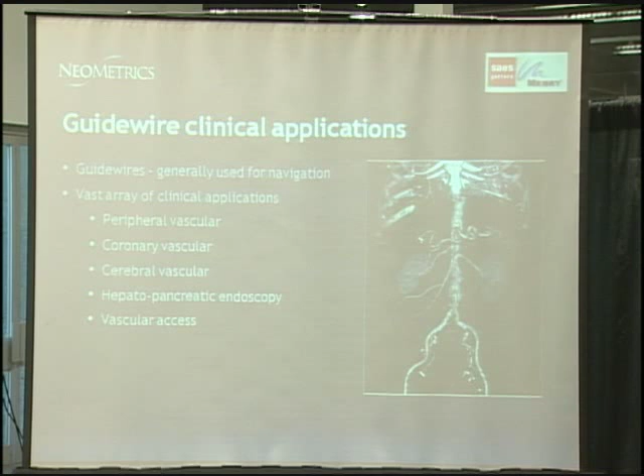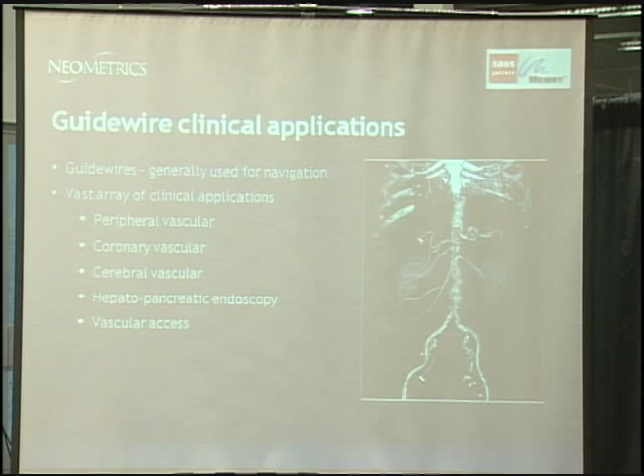GI, biliary tract access and pancreatic duct access, and lastly vascular access, which is typically for the placement of PICC lines and micro access for getting into the venous system.

When we look at guidewire design, we focus in on a variety of physical properties and physical attributes that really drive the performance of the wire. This relates primarily to the core material, not so much the selection of coil material or tip configuration.

But one of the most critical elements of guidewire design is the column strength or the pushability of the wire. This is a function of not only the material, but also coatings that might be used, whether they're hydrophilic, PTFE, silicone. But in terms of the drive to improve binary nitinol performance, column strength was one of the key targets in trying to improve the column strength of a superelastic alloy.

Torqueability is also a critical factor. Given the softness of nitinol, its torque properties are not as good as stainless steel, and it has a tendency to build up a lot of torsional energy, which when navigating through a very tortuous path, it will build up energy and then release, causing a very severe whipping effect. And we wanted to eliminate that property of binary nitinol in this new material as well.

Another frustrating feature of guidewire performance for the physician is what we call a torque lag, which is when the proximal end of the wire is torqued, there is a concurrent lag in the transmission of that torque to the distal tip of the wire. And again, nitinol is notorious for having a non-responsive torque lag property. Lubricity obviously is critical, especially in tight strictures, and hydrophilic wires are very widely used.

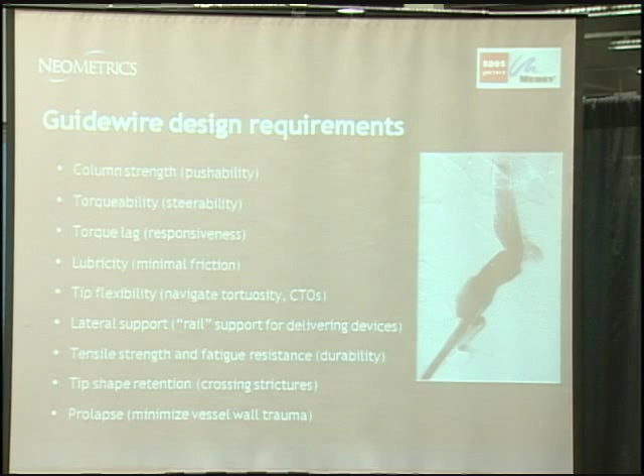Tip flexibility, we focus on tip flexibility matched to the anatomical scenario being dealt with. And so that is something that can be almost infinitely adjusted depending on the anatomy of the patient and the requirements. Now, we have a nomenclature system in the guidewire world where we measure tip flexibility in terms of grams of force. And so in PTCA wires, physicians are very accustomed to saying, well, I'd like a 12-gram tip, a very stiff tip, or a 2-gram tip, which is a very light tip. And they speak that language in terms of tip flexibility.

Another property is also the length of the grind profile, or the attenuation of the diameter at the distal tip, which is what we call the rail support of the material and the grind profile. The rail support is really the backbone of a guidewire for the delivery of various devices. Without the rigidity of the rail strength of the material, certain devices just can't be delivered, especially when they're moving through a highly resistive environment like a blood vessel with lesions or blood clot.

The tensile strength and fatigue resistance, we focus on these primarily from a safety perspective. There are requirements for tensile strength. The good news is all of these materials meet essentially all the tensile requirements.

One area that the physicians rely on heavily is after they have assessed the condition of the patient, have a feel for the navigational path that they need to take with the wire, they many times would like to modify the wire's tip configuration from what it was provided with in the packaging. And so physicians are very adept at modifying the tip configuration of a wire actually while they're standing over the patient. And the ability of the wire to retain that tip modification by the physician is critical.

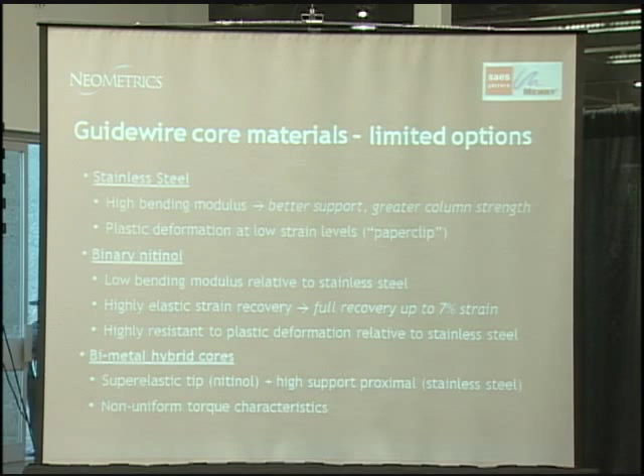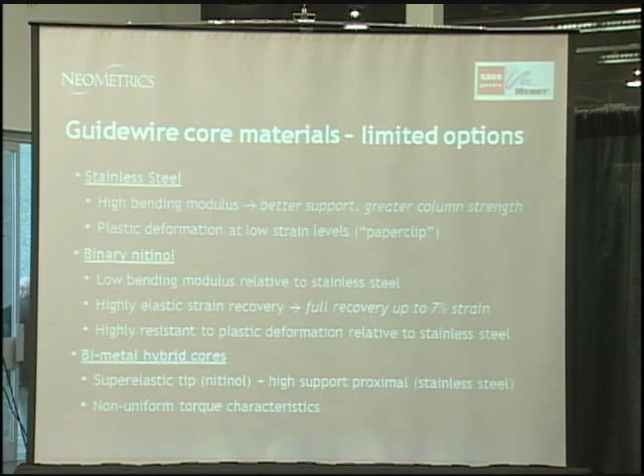The nice thing about nitinol is that because of the strain recovery, the physician can really navigate some very tough anatomy and abuse the wire, so to speak, without it taking a permanent set. But in terms of its pushability and its softness, it's not capable of delivering heavy interventional devices, especially when the wire is a very small diameter.

Another technology that's arrived on the market in the last 10 to 15 years is the use of bimetal cores. Bimetal cores are basically taking the attributes of nitinol and putting that on the tip of the guide wire and using the pushability and column strength of stainless on the proximal end of the guide wire. And there are a number of wires out there that incorporate the bimetal design.

There is some asynchrony between the torque transmission of the two materials, so you can imagine that when the stainless steel is torqued, you don't get a commensurate transmission of the torque to the distal nitinol tip. And there's a little bit of a training curve with the doctors, but these wires have become popular in certain applications. One in particular is PTCA.

So to really summarize some of the advantages and disadvantages, nitinol, obviously very resilient, able to navigate diseased and highly stenosed vessels, but very low on support. We like to think of it as a four-wheel drive truck, being able to go through some pretty tough conditions. It conforms to the anatomy without deformation.

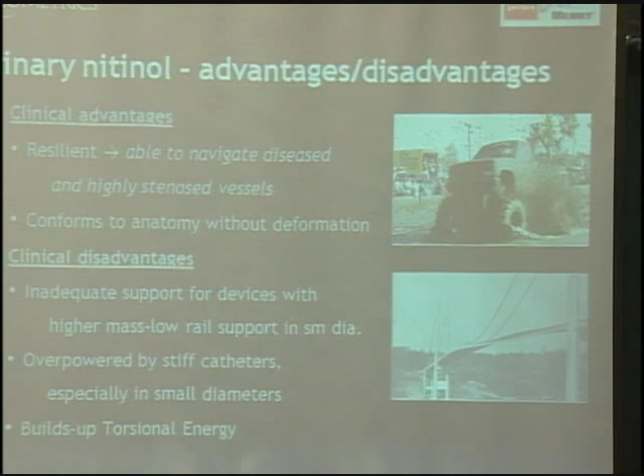The clinical disadvantages: inadequate support for devices, very low rail support, especially in small diameters. So when you get into wires that are used for neuroradiology, going up into the brain for embolotherapy or embolectomy, nitinol wires are great for that, but they generally don't have the rail support of stainless steel.

So the solution to this performance gap between the two different materials is what we're calling the Trident Alloy. And the Trident Alloy is actually a modification of binary NiTi, which incorporates a cobalt component. And for those of you who are chemists, you may know that nickel and cobalt reside next to each other on the periodic table. And the interesting property that cobalt imparts to this material is it raises the peak loading forces, or the modulus, for lack of a better term, of this material, while retaining the superelastic properties of NiTi.

So getting into smaller diameter guide wires, it provides much more rail support and pushability than a standard binary NiTi. It has superior torque transmission properties, and we think it may eliminate the need for bimetal type wires where, as I mentioned earlier, there's a fusion of stainless and binary NiTi.

What we're also finding is that there are certain applications like jacketed wires where an outer jacket is required for electrical insulation. The core material diameter is minimized because the jacket has to be a certain size and the OD of the product has to be a certain size. And this material allows an increase in stiffness, superelastic behavior, while maintaining the fixed diameter constraints that the engineer has to deal with.

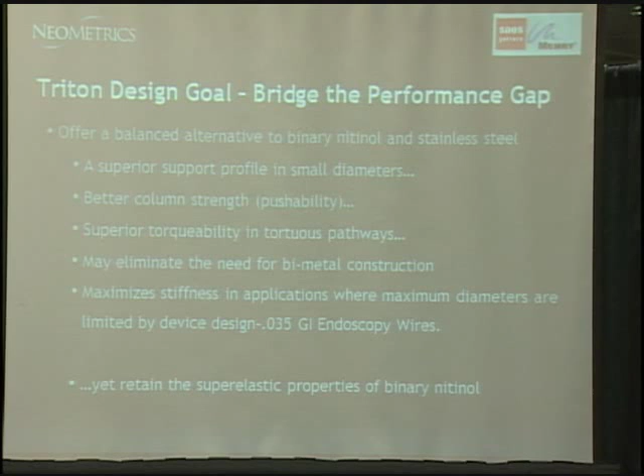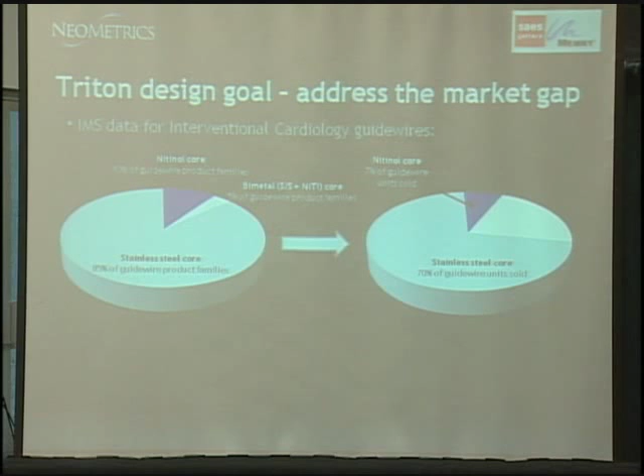So our goal was to really bridge the gap between the stainless market and the nitinol market. And based on the testing that we've done so far, we think this material will actually do that. Right now, in interventional cardiology, only about 10% of the guidewire families that are out there, now these are groupings of products as opposed to every individual code, are nitinol. And the bimetal wires represent about 5% of the families, but they represent a huge percentage of the actual total volume.

The BMW wire, which many of you are familiar with, the balanced middleweight from Abbott, is the #1 selling wire. That is a bimetal wire. And of course, the technology and the cost of bringing those two metals together in a single guidewire design is fairly expensive. So the solution to that problem is to come up with a wire that has a single body construction, a unibody construction, but have the column strength on the proximal core and the flexibility and superelasticity on the distal tip.

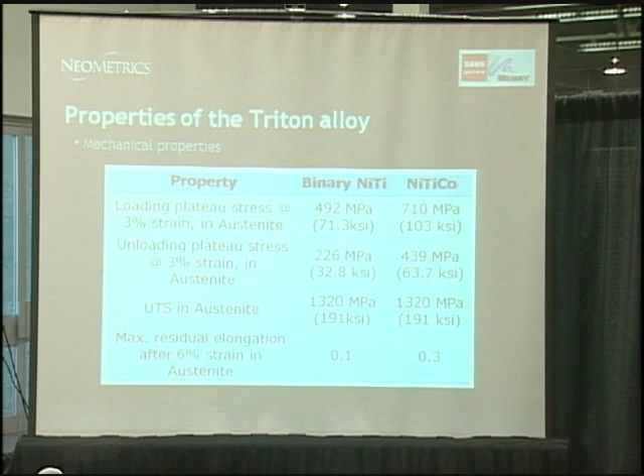As I mentioned earlier, what we've done with this material is we've incorporated a cobalt element to the nickel titanium crystal structure, and as a result of that, we've increased the modulus of the material by about 40%. In terms of some of the actual numbers, the loading plateau stresses for binary NiTi are about 492 MPa, or 71 KSI. This material in the equivalent diameter at 3% strain is at 710, a significant increase.

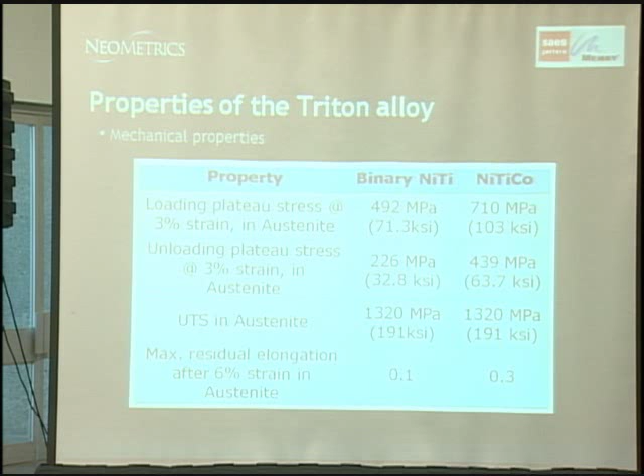The unloading plateau stresses coming off the hysteresis curve are 226 for NiTi and 439 for the cobalt NiTiCo. So you can see across the board the stiffness properties of the material, both in loading conditions and unloading conditions, are considerably higher than binary NiTi. This is the typical 3-point bend test with the hysteresis curve. If you look at the two loading curves side by side, you can see that the peak loading forces are about 40% higher.

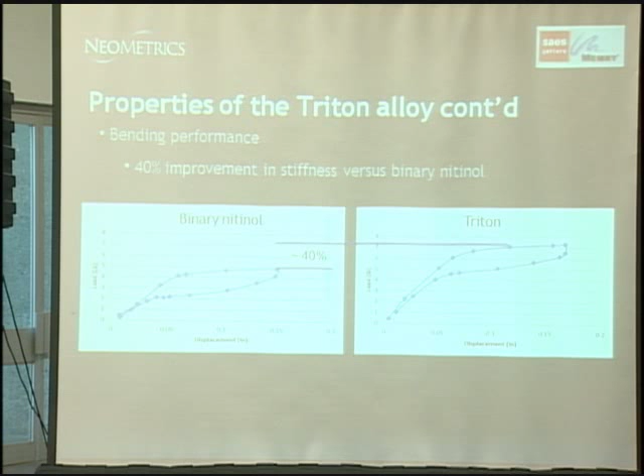Getting back to the effect of strain on stainless steel, this again is a 3-point bend test showing the loading of the stainless steel to a maximum strain level, and then when the load is released, the wire does not go back to its original 0 starting point. That's the plastic deformation that we talked about earlier. The Triton alloy is right between stainless steel and binary NiTi, with a hysteresis curve similar to binary NiTi, but going back to a 0 starting point within 6% strain.

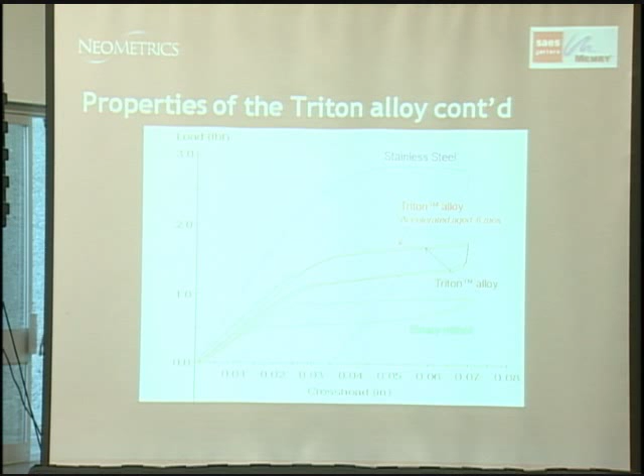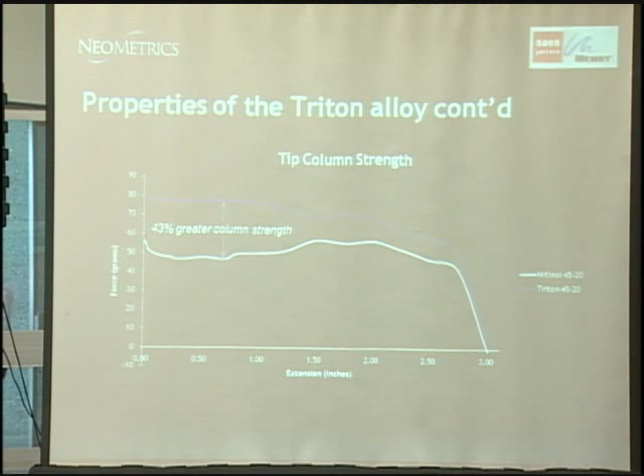In terms of pushability, we've also measured this in our laboratory under various test conditions. We can share our test method with you if you'd like, but we're measuring about a 43% increase in the pushability of the material as well, which is also a function of the material's peak loading forces. In terms of torque response, we've eliminated a significant amount of the torque lag seen with binary NiTi, and in terms of actual torque transmission, we get about a 26% better torque response.

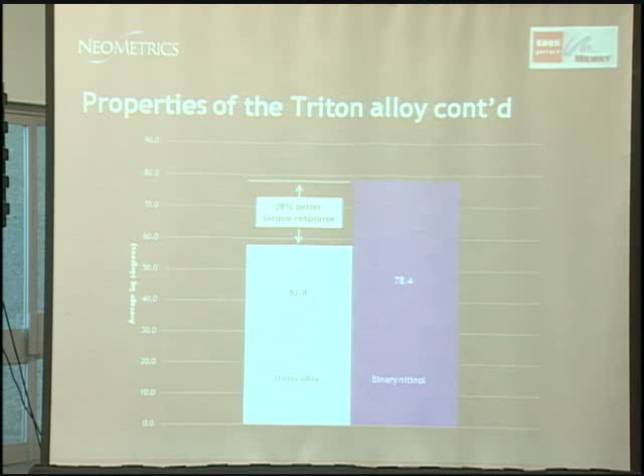So what are we planning to do with this material? As I mentioned earlier, NeoMetrics' business model is to bracket a variety of design specifications within clinical segments and then offer our customers the ability to spec out guide wires within those ranges. What we have done so far is we have pursued FDA clearance for a line of interventional radiology or peripheral vascular wires and also PTCA wires. And we received the clearance for this new material in a specification range of wires back in September.

We have just been wrapping up our design verification work, and we are pleased to report that in PTCA applications where nitinol wires have failed miserably, this wire is performing beautifully and does provide the superelastic tip that prevents deformation and having to start over again.

We had a few testimonials here from the doctors that had actually done the cases for us, and almost universally we're finding that the torque transmission around multiple turns is superior to even stainless steel. It tracks extremely well, and the torque transmission is nearly 1-to-1. Easy steerability for crossing various lesions or in-stent restenosis. And so we feel that we have a winner here in terms of being able to bridge the performance gap.